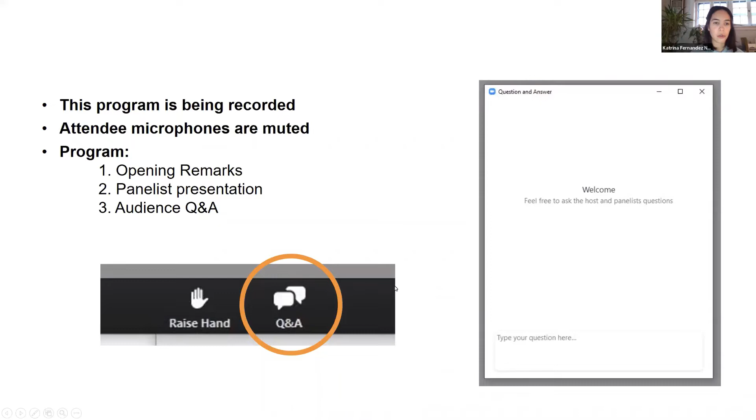For those unfamiliar, the CTBUH, or Council on Tall Buildings and Urban Habitat, was founded in 1969. It's a nonprofit, multidisciplinary, worldwide association focused on tall buildings and sustainable cities. As of 2020, the CTBUH organizational member network included over 2 million individuals in over 10,000 offices around the world. The Future Leaders Committee, especially here in Chicago, is a group of volunteer young leaders in the industry, and our goal is to get future leaders interacting, networking, and provide events like this to give everyone insight into what we're up to.

Now I'm going to introduce our speakers. JJ Tobolski is an associate at Thornton Tomasetti's Chicago office. He has 10 years of experience as a structural engineer. A Chicago native, JJ has been involved in the design of numerous high-rise and cultural projects, both domestically and internationally, in addition to acting as one of TT's leaders in structural optimization.

Tim Winstanley is a senior architect at ASGG, working across a range of typologies including cultural, super tall towers, and large-scale mixed-use developments, including two World Expos, such as Dubai 2020+1, which we'll be presenting today. Tim leads some of the most complex design efforts at ASGG, which, along with his on-site construction experience, ensures the design vision is executed correctly. That's it for my intro, I'm going to pass it on to our presenters. Take it away. Thank you, Katrina.

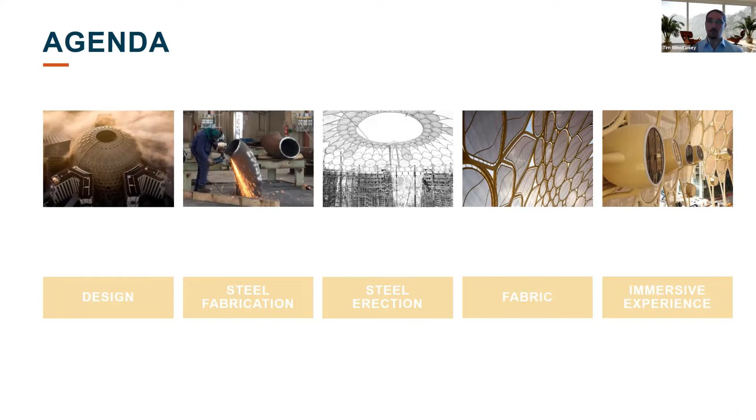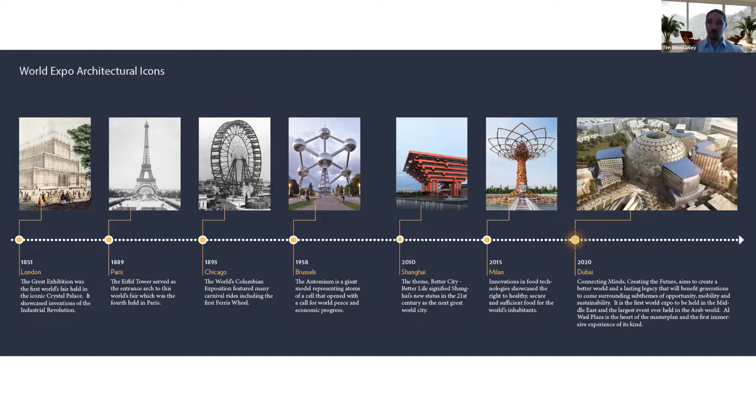A quick intro on the design. World Expo is an event where countries from all around the world gather to present and showcase innovations happening in their country. Throughout the past 100 or so years, there have been numerous icons known to represent those particular cities - for example, in Paris, there's the Eiffel Tower. As we move along towards 2020, a very important expo because it's the first expo held in the Middle East, the goal is to create a cultural icon for Dubai, linking their main theme, which is connecting minds and creating the future. Wasl in Arabic means connection.

One of the main things behind the design of this is how to design an experience first, a place for connection and meeting. Something we've always been doing is exploring ways to enhance architecture and experience through immersion using materials such as light, shadow, video projection, in addition to the solid built materials.

So again, just touching on the idea of creating experience first, and how do we start to harness all the activity that is going on. You'll see the 3 petals, and there's pathways that encircle each one, everything leads back towards Al Wasl. This is seen as the heartbeat of Expo and will become a beacon for the Expo, and then lives on in legacy mode when the development transitions to a new neighborhood in Dubai South.

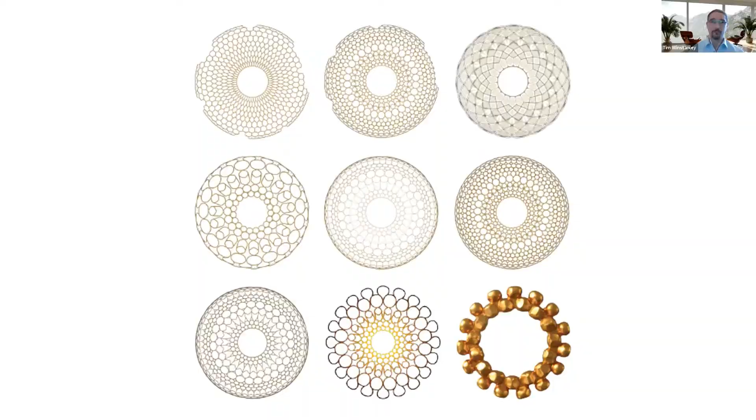One of the main things we're going to talk about is how this was constructed, and one of the ways to construct something of this scale and magnitude. While from the outside it may look complex, it's actually simplified into 27 radial segments, and this is a good segue into the fabrication because it leads to efficiencies during the fabrication process.

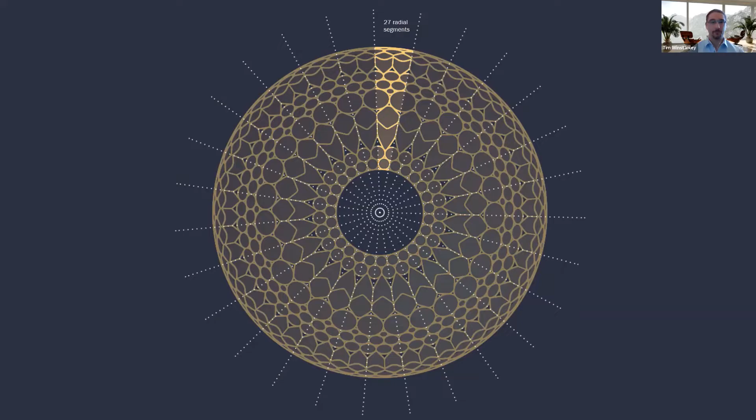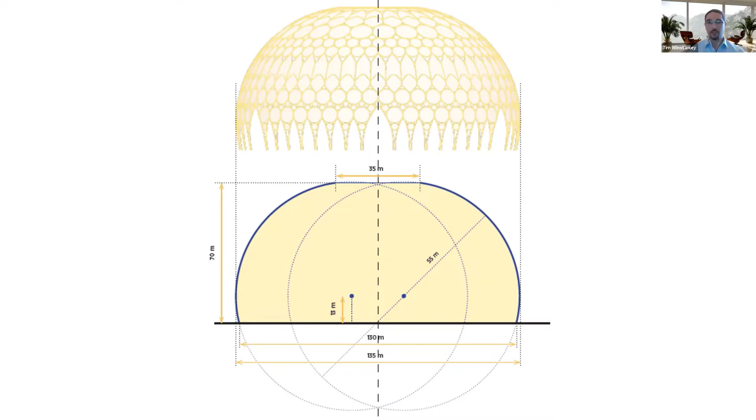Just to get an idea of the scale, the trellis is 130 meters in diameter. It's just under 70 meters tall to the top of the oculus, and the arc that makes up the frame of this is a 55-meter radius arc.

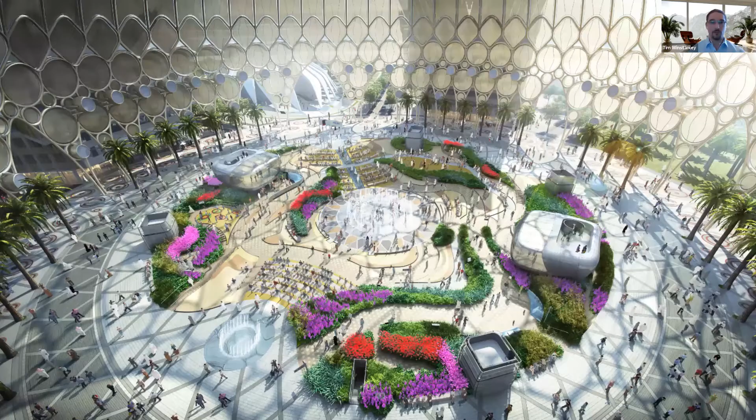This image here is showing what the Al Wasl Plaza and Trellis will look like during Expo mode. So the 6 months that Expo is operating, there's a bit more hardscape, but this is because it is going to be heavily occupied with all the visitors, and there'll be events happening every night and during the day throughout the course of Expo.

Now the interesting thing is for the expos, typically they're built and then deconstructed, but part of our vision at ASGG is to breathe life into these projects after the expo is done. So in legacy mode, once Expo wraps up, this becomes a garden and the central hub and node for the new development of Dubai South. This will live on as a cultural anchor in the south of Dubai.

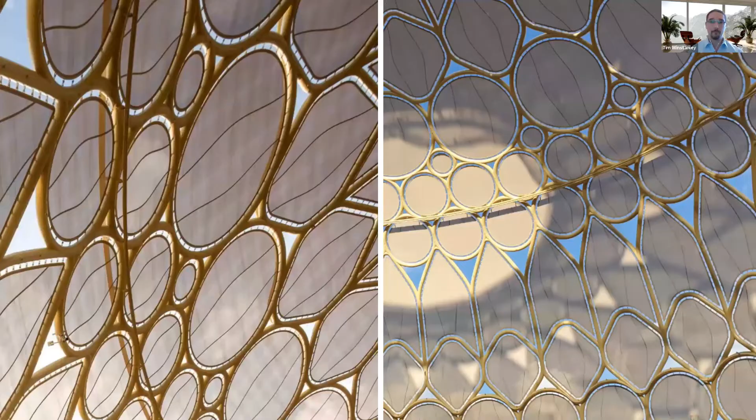Touching on the aspect of the fabric and the steel and this idea of playing with immateriality - playing with light and shadow and harder elements versus softer elements. The fabric is an integral part of this project, not only because it diffuses the sunlight, but also because it becomes the canvas for the immersive experience.

Just a quick stat rundown of some of the immersive aspects of it. Embedded within the steel pipes, there's roughly 2,800 LED lights that run along with the projectors. There's 42 projector enclosures that are cantilevered off the steel trellis, and then there's also 12 speaker enclosures that house these state-of-the-art speakers.

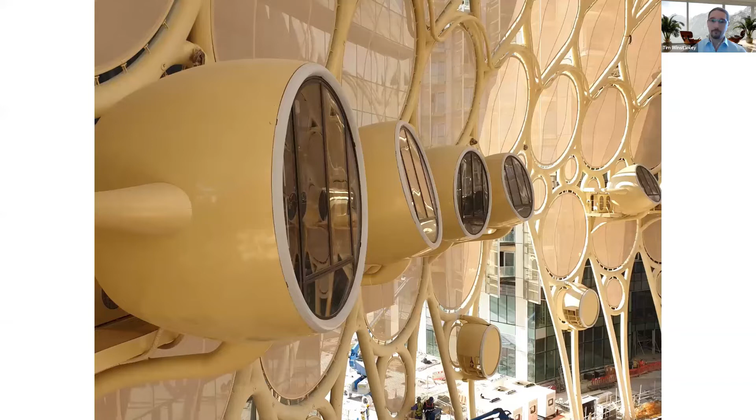This is just a snapshot, which we'll touch on a bit later, but this is showing the custom projector enclosures on the top portion of the image. Then in the lower right, you can see what's still under construction are the speaker enclosures.

This is a fairly recent picture - this is a projection all in red, indicative of the UAE's satellite just reaching Mars. Just to get an idea of the scale and the context of what's going on.

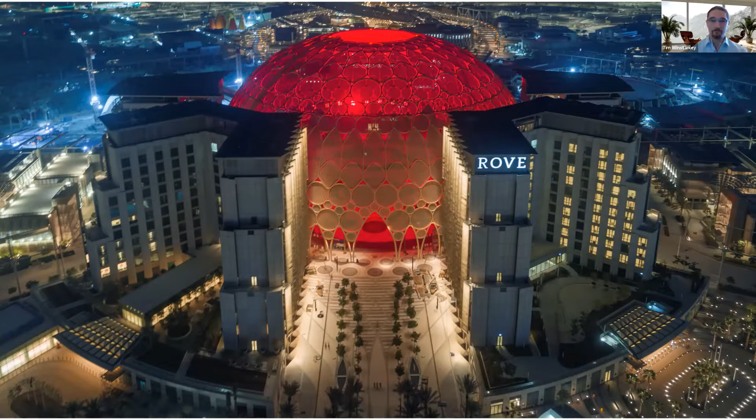The same thing here - this is an image actually. We'll go to the video. That's fine, we can start the video.

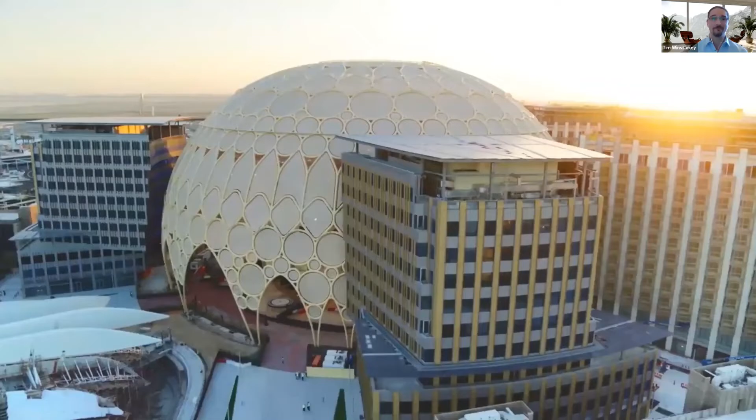So this is just showing some of the LEDs going off there. This is during a test that we ran back in January, showing the video projection in action here. And you can see the people at the bottom there for scale.

All right, well thank you, Tim. I think we'll catch back up with you when we start to get into the erection phase, for when you were stationed over on site.

So I'll add in a couple more things about the structural design here, and try not to be too dry, touching on some of the important aspects of doing the structure of something so unique and interesting. To give you a snapshot of the different parts and pieces we have, the trellis itself does not sit directly on the soil.

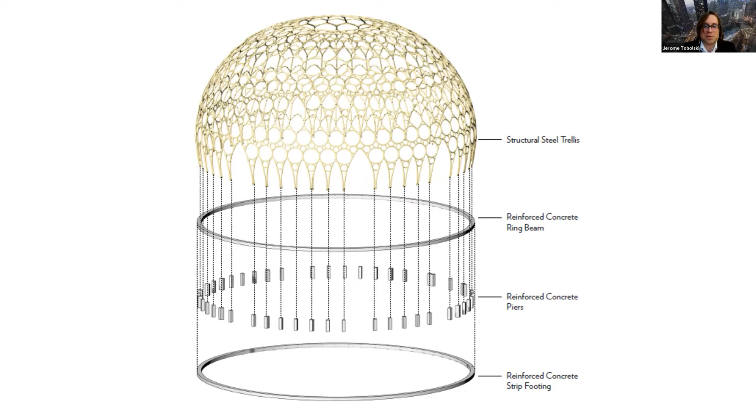There is actually a central basement underneath all the plaza work, and some site tunneling there to service the buildings around, so there was quite a few things we had to contend with. We have the framework sit and be founded on a concrete frame below it. This frame is composed of a concrete ring at the base, then a series of piers where each of the different arches of the trellis come down, and a strip footing. There's no deep foundations here - there's actually some pretty good quality rock that we're able to bear directly on.

One thing I want to add is there were many different iterations - they looked at very different frameworks early on, but there was also a lot of thought and attention paid to how these rings interface together. In addition to having everything simplified as a series of different pipes along the circle, we also wanted to ensure that everything was planar and in a 2D curve so it could be fabricated in a reasonable manner.

Not to say it's impossible to do some of those 3D swoops, but we knew that because of all the different complexities on this project, if we could refine the geometry to a point that everything was 2D based, we'd have a good look. It also accomplished two things: not only the fabrication, but it also helped achieve this really nice clean look that you see at each of the merging points.

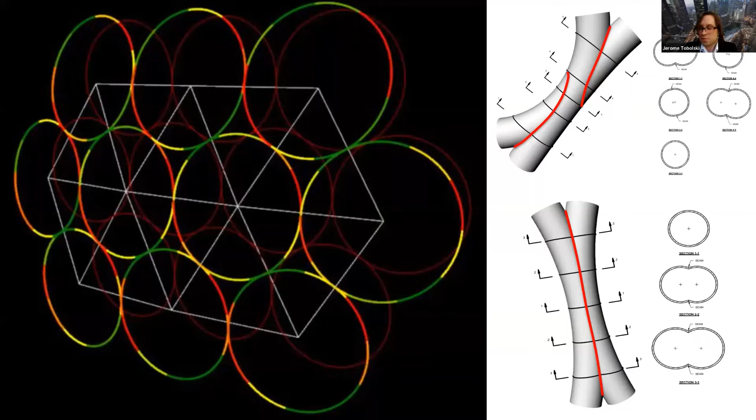Before we did some of this geometry studies, and we even continued to pursue these things throughout the construction phase, working together with the fabricator to alleviate some of those conditions you see above, because this thing is a sphere, so it's not always easy to have everything 2D planar when you have circles and different planes. In order to get those to join nicely, a lot of care and attention was paid to developing that. Just to give the most basic understanding of this framework - it is very complex at first, but in the end, it is still very much a dome.

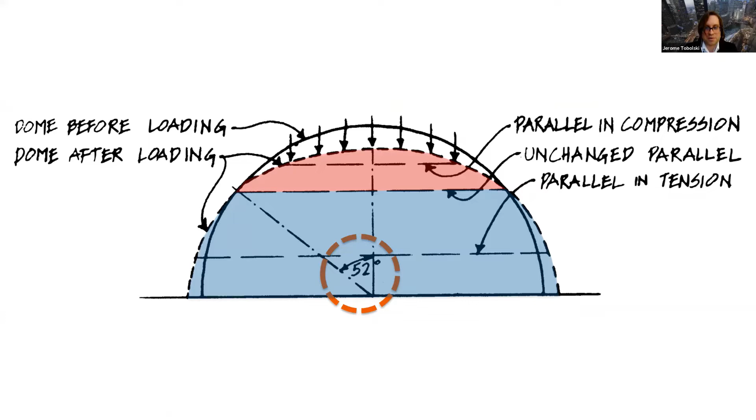Depending on where you're at throughout the height of the dome, those hoop stresses are either in tension or compression. At the top, it's in compression, pushing down and coming in, and at the base, those hoop stresses are in tension because it wants to splay out at the base - so those hoop stresses are restraining it. With everything being equal in a perfect world, you can mathematically derive that the point where that changes is about at the 52% marker, or 52 degree marker from vertical.

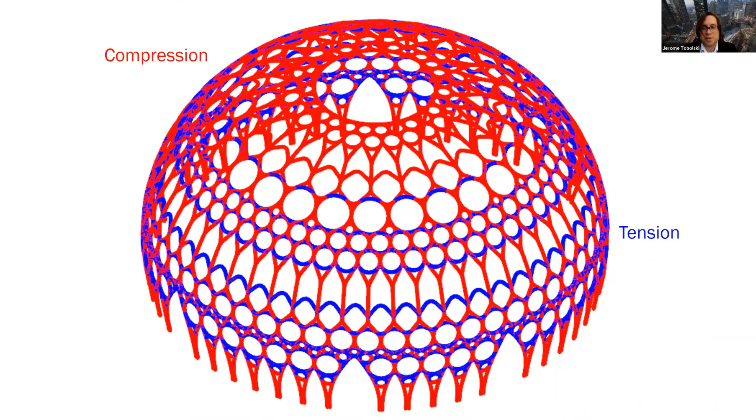In our system here, it might be a little bit of an odd looking path, but we do find that with red being the compression and the tension line, as you go up and down vertically, everything is primarily in compression. And then once you get beyond a certain threshold, you have tension stresses that go around the ring and help restrain that structure.

With the top being primarily in compression and this being such a slender and elegant grid shell, you really have to be careful about the sensitivity of the structure to buckling, not just under applied loads, but also managing imperfections that might occur during construction. If something starts to be built slightly out of tolerance, that can have really big knock-on effects on the structural design as a whole. So the way to manage that is to constantly be analyzing your structure and benchmarking to ensure you're not outside some normal bounds.

But if you really are on a threshold, really close, and designing something to the absolute limit, there can be some really intense increases in stress. That's something we were continuously mindful of and designed against.

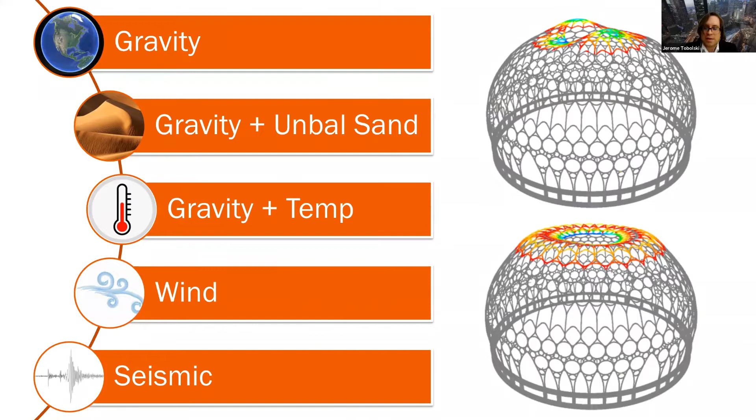We had to look at tens and hundreds of different possibilities that could occur. These are just a few buckled shapes, but we looked at them for all different conditions: wind, seismic. We looked at conditions with unbalanced sand at the top, as it was so sensitive, and it really is quite a lot of analysis work to go through all these things.

So we even developed some custom scripts as we went along in order to generate through these, do all the design checks, manage these things, and run them overnight to be able to work effectively.

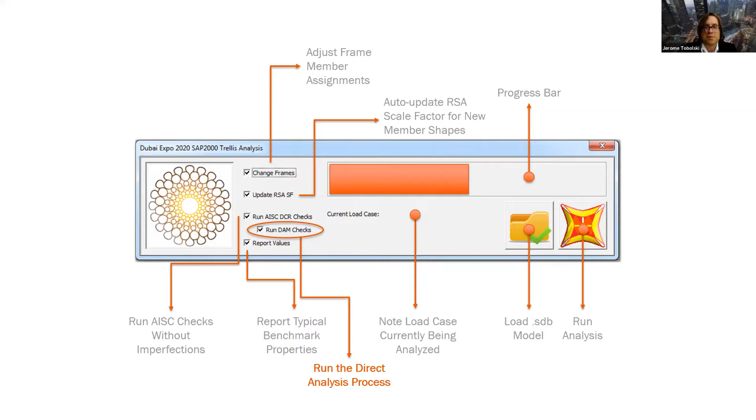The other thing I want to highlight about the region is seismically, it's more or less moderate. The Dubai municipality imposes some higher limits that you have to design for, but in general it's mostly wind governed.

We had done a high frequency pressure integration wind model with RWDI for this, because it is a very unique dome that has a center oculus open at the top, and there's all this area below with the arches and gateways that wind is able to travel through relatively freely. So it's quite different than just a solid dome.

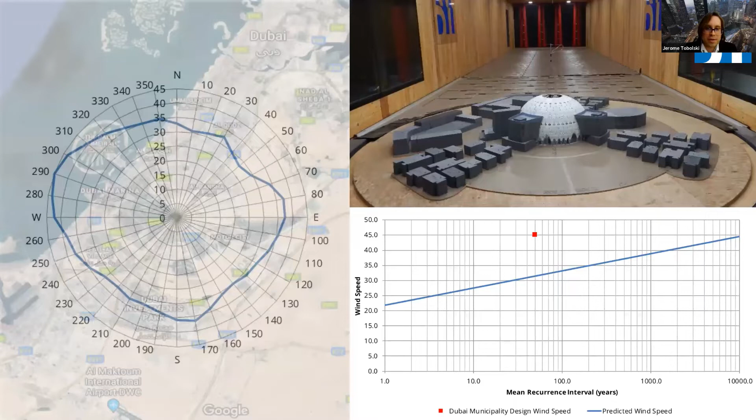The final part of the design I want to touch on is all these connections. Ultimately, we were not the final connection designer for the project. That got awarded to the fabricator, who had their own engineers that executed that work, because some of it is dependent on really how they want to build it. So in this situation, we just did enough work to justify to ourselves that the frame elements we were designing wouldn't have any hidden surprises as we got into fabrication.

So what we had done, we did a lot of modeling in place, a lot of mesh sensitivity studies and things of that nature. Pretty much everything short of just specifying all the welds, we really ran through a lot of the same checks that the fabricator's engineer ultimately wound up doing. We went completely top to bottom of the entire framework, and I identified each unique node and looked at the controlling cases for each.

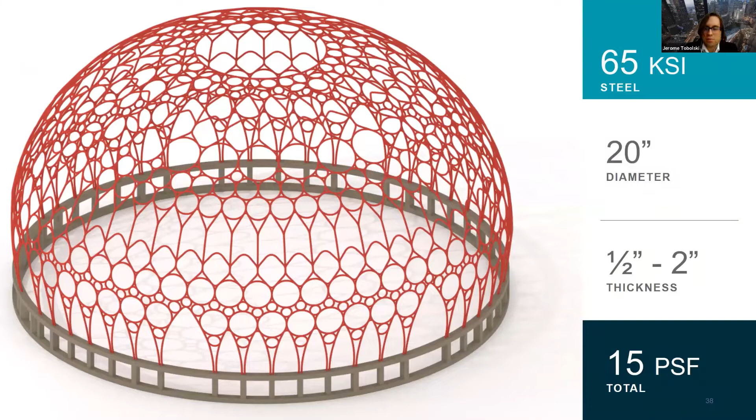Ultimately, in the end, this is the system we wound up with. We had 65 KSI steel, which is an S460 steel equivalent. A lot of that steel was coming from Europe, but there was also some from China. It was 20 inches in diameter all throughout, because we wanted to maintain a consistent diameter to help facilitate those connections, and also a consistent look across the whole trellis. The majority of it is in the half inch to inch thick range, but in some high profile areas like the UAE entrance, they get up to 2 inches for those big arches. In the end, it was a very lightweight, very elegant structure at only 15 PSF. So very well performing, efficient structure.

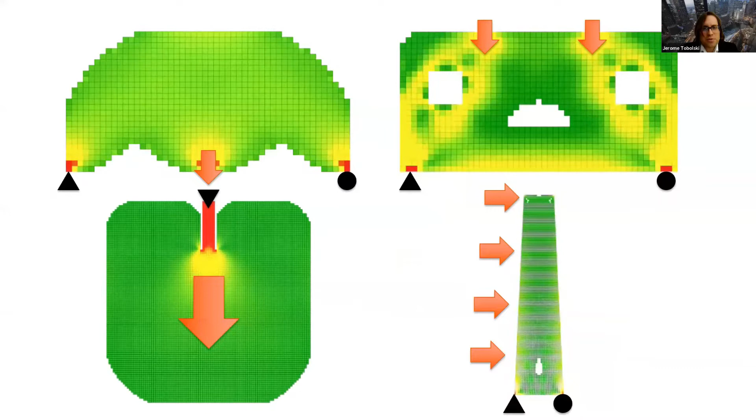And it wasn't just the framework that we paid a lot of detail to. We worked very closely with Tim and his team on helping to define the fabric brackets themselves that attach to the steel members. This was primarily done through using topology optimization.

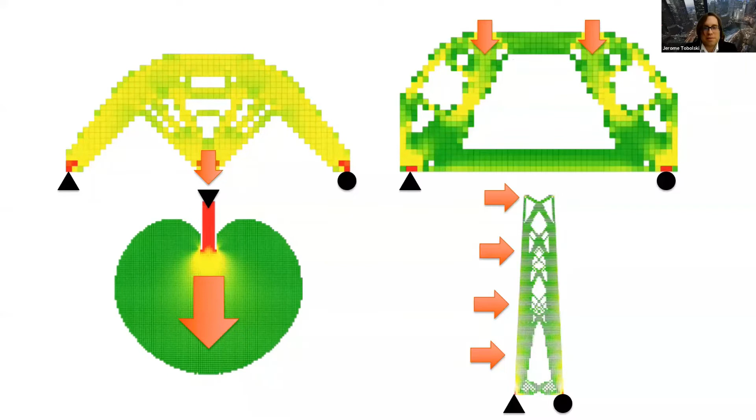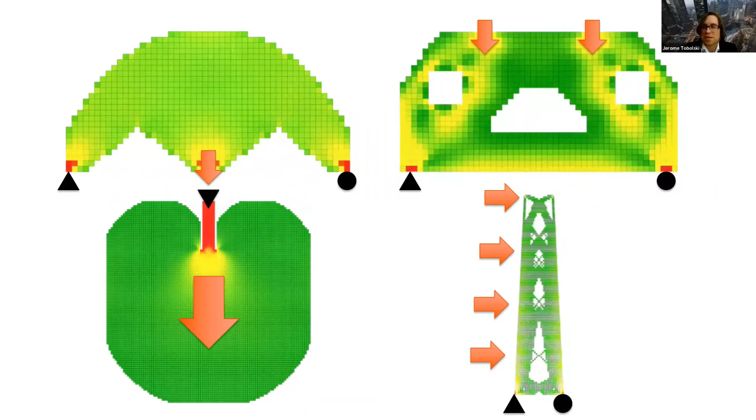We generally have an idea of what sort of optimum forms are, but in this kind of process, you start with a given design domain, what you saw in the beginning, and then at each step you start to pull away material bit by bit where things are not really doing a whole lot for you. You can either be doing that on a stiffness basis or a stress basis, looking at different boundary conditions and the like. On the bottom left, for instance, you see a situation where you're telling it that you can only remove material on the outside. By doing that, you start to see how fruit actually winds up being the shape that it is, because in nature that is the most efficient shape that it wants to be.

So maybe for these two slides here, I think maybe you just want to walk through that.

So running it through the topological optimization process, where we anchor the ends where it will be welded to the steel pipe, and then introducing the stress forces from the tensioning bolts, which you see in the bottom right mock-up there, this started to reveal the optimal path where we could keep the structure and then remove any of the excess material.

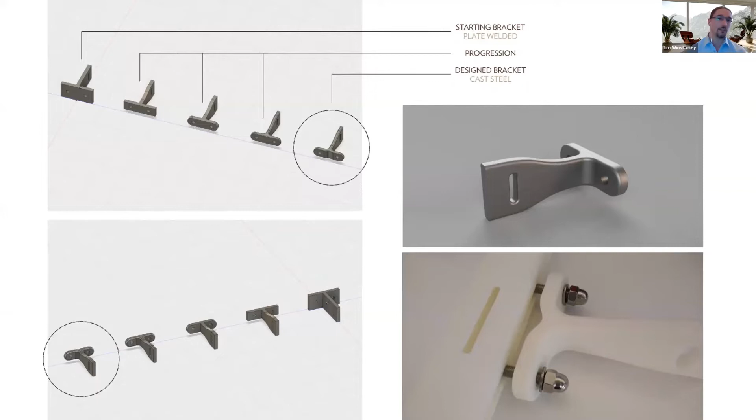So what we ended up doing was reducing the overall amount of material by about 45%, which, okay, it may seem not so much. The baseline bracket on the left weighed about 2.5 kilos, and the one on the right, which was fully optimized, ended up weighing about 1.5 kilos. If you spread that over the 17,000 brackets, then it starts to add up. So this was an interesting process, a small part of the overall trellis, but something that was quite interesting.

All right, thanks Tim. So then now I'll get into the fabrication for a little bit before handing it off again. When this fabrication process began, because of the scheduling that the fabricator had to hit, there was a really aggressive push to be able to work fast and work through a lot of different iterations and get answers to questions on things. So ultimately I wound up going and being stationed in the fabricator's office, was Cimolai, in the northeastern part of Venice there. It's actually about an hour and a half away.

As we said earlier, the full design and general contracting team was Cimolai and Rimond, a joint venture between these two Italian companies. I was there for probably a period of 4 to 5 months as they were in the thick of it, doing all these different mock-ups and also putting everything together.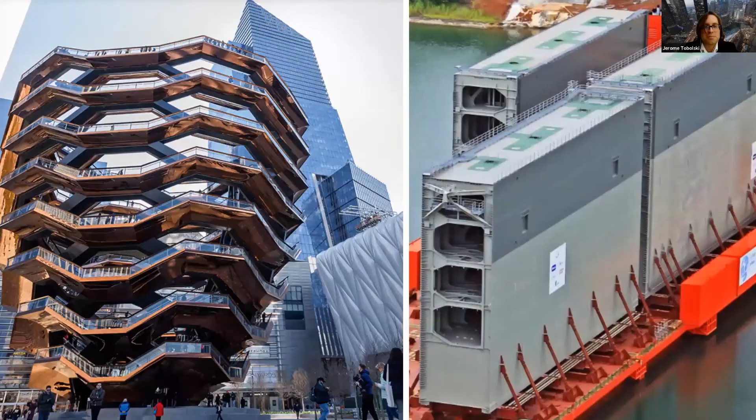So just a brief snapshot of Cimolai. They've done some pretty high profile and complex projects throughout the world, so they really were a good fit for us to deliver this project. On the left, we have the Vessel in New York, and they also did work on the Culture Shed, which you sort of see in the background there. On the right is the Panama Canal. So big, large-scale structures are not new for this organization.

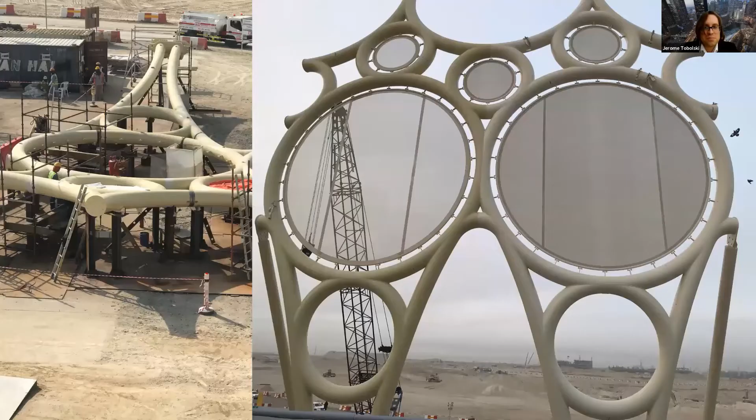And even before they were awarded, there was actually quite a bit of attention where there was a pre-construction steel assist team that was also working with the design team to help us define things really early on. So when we did finally get to that award phase, there weren't going to be any big surprises.

So there was a site mock-up that was done, and this was used to do many things like test different paint colors and look at different bracketing and different fabric joining and things of that nature, even different steel connection approaches. So this really was used to define a lot of things for us early on.

And then when Cimolai came on, they also did a lot of their own mock-ups, and some of these are just a couple images from the first workshop that we had with them. They were almost like living shop drawings, where this mock-up was used to define a lot of the finishing that was going to occur in the final product, in relation to the grinding of the welds and how that transitioning works out, how the seam shows up or how the seam's ground down, many different things.

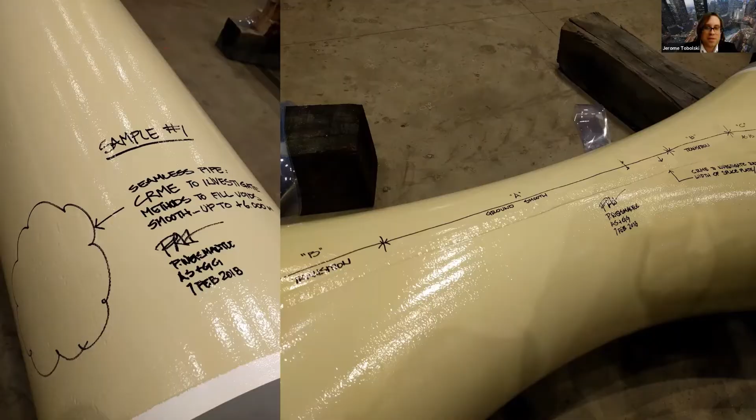Just to give you an idea of how some of the finishes on these things look, on the left there's seamless pipe where you don't have a seam because the pipe is made by being extruded through a die. On the right, there is a seam in that member because it starts out as a flat plate and then gets rolled up through a mechanical press. So a lot of attention was paid to looking at different situations.

A lot of this seam pipe is something that Cimolai manufactures themselves, but because so much workshop space was really being devoted to the development of the actual frame, in the end it wound up being more appropriate for many concerns, and especially aesthetically, to go with the seamless pipe.

But the only issue with the seamless pipe, which was a little bit interesting to us, is that when it got painted, for us as structural designers it looks like painted steel, which is sort of what we expected. But that pitted look was not exactly the smooth finish you get with the bent plate on the right. So there was really a desire to have the finished look of the right, but not have the seam, and be more like the left. Ultimately an epoxy was used, and I'll get into that a little bit later.

This just shows this giant press that they had where they actually make the pipe. And then as we get into discussion about grinding some of the welds, it's important to be careful about what sort of specification you're saying, because depending on where you're at, there are certain different meanings about what exactly is ground smooth filled.

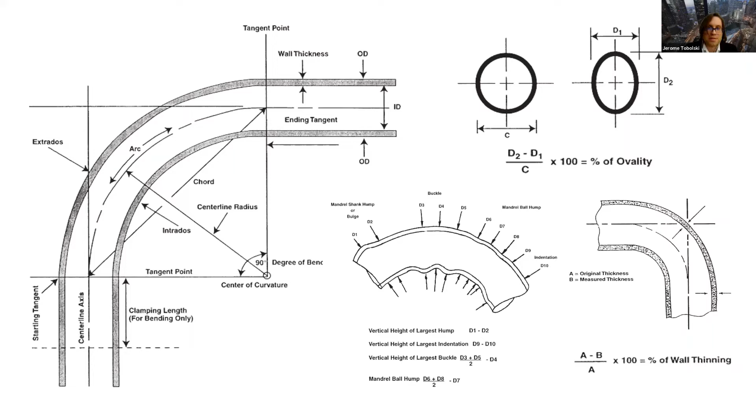There's also some crippling, but that's not really a big concern with induction bending - if they go slow enough, you don't really get that waviness. It's actually pretty clean. So again, this is just the ovality and how it can change some of those properties.

So for the big arches, they were able to feed them into cold bending machines. They'd put in the whole arch, the biggest section they could, and have it come down and press it, getting those pretty big radii.

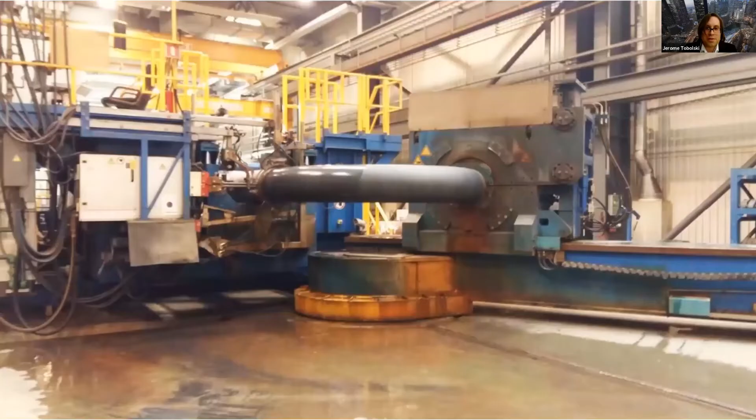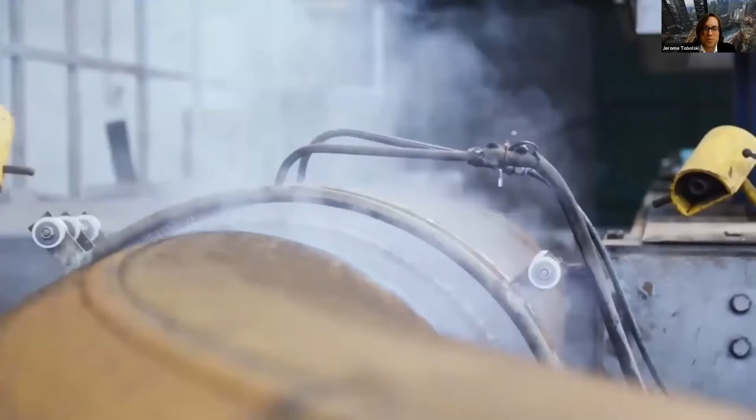But then for induction bending, that's actually a machine - I'll show a quick video of this process where the pipe gets heated up. There's a coil on the outside that's electromagnetic and heats the steel. As it gets heated, it's drawn through the process. There's a clamp on the end with a set of rollers that pulls it through in a gradual swoop to make whatever bend is needed, then it immediately cools it - that's why you see the steam as it comes off.

After each one of those bends, quite a bit of work gets done to those elements, so much so that it actually changes some of the mechanical properties. In order to revert back, these go into giant ovens for 8 to 10 hour heat treatments that help get them back to the properties they used to have. That was very important for us, since they were doing structural work, not just conduit or something where this might not be necessary.

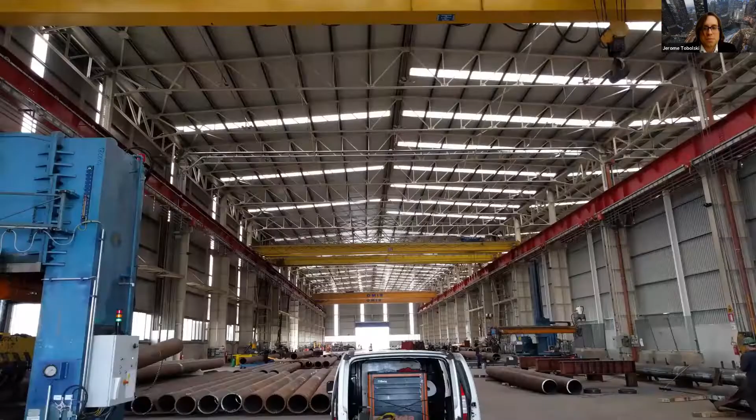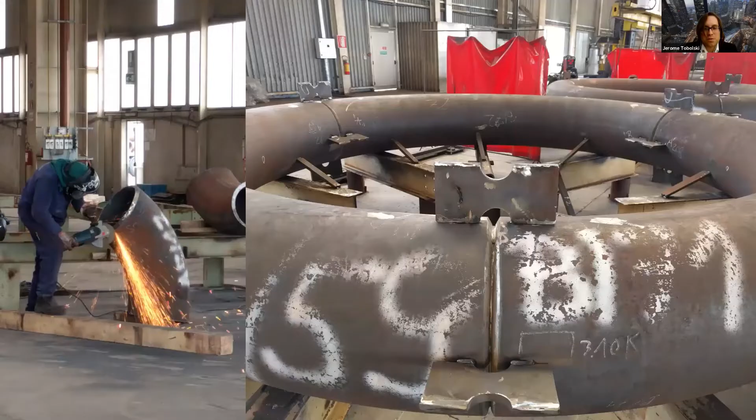So I'll very quickly wrap up by stepping through the workshop to show how they put each of these things together before shipping them off to Dubai. Here's the staging area - they had all the pipes, including some bent ones from other places, and they ground off the edges to do weld prep for each of them.

Each ring was done in a series of 120 degrees, which is why you see 3 different zones there. Then they would fully weld them up with complete joint penetration welds, not necessarily where the site welds were going to be, but just to get them as one continuous ring. From there, they would cut off wherever needed for each of the different connections to adjacent rings.

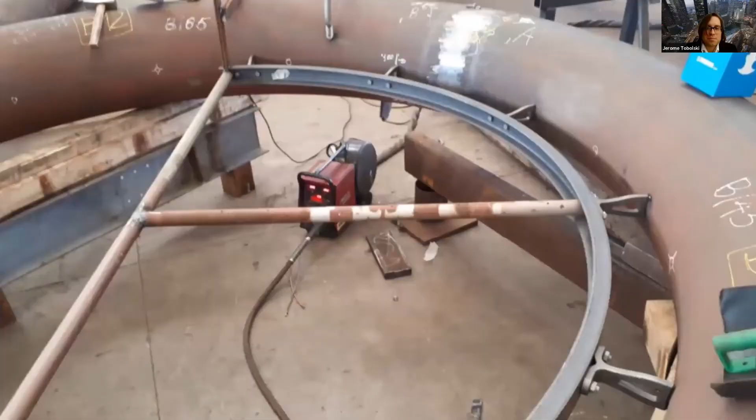And then at that point in time, they would also have the jig to put in all the fabric brackets that you can see around there. And there you can see that full penetration weld up top there.

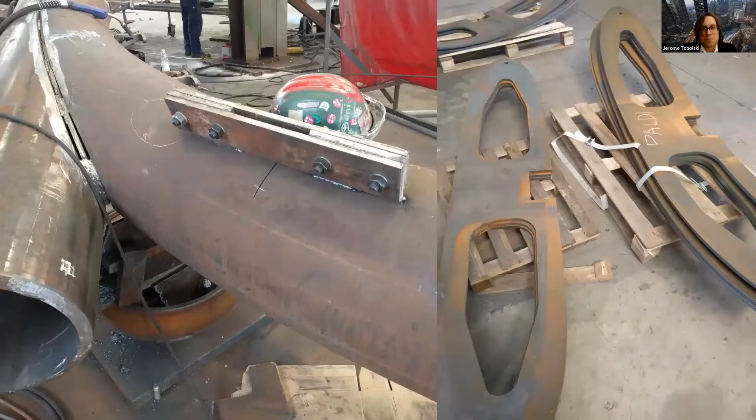Once they got all that put together, they also had some splice plates that helped facilitate that connection. The splice plates did a few things for them: it gave them a clean surface to weld to, and the reason they have those openings is so all the conduits for the LEDs and other systems could be fed through uninterrupted.

So what you see here is kind of a giant fit-up frame, which you'll see in the next photo. They get everything geometrically right before they make the full connections between the adjacent pieces. Then there you see an intended splice area for the different modules that they ship out. This gives a bit of scale, and here's a shot from above - they had a small crane there one day to take a photo. This would occupy an extreme amount of space in their shop, but it was really necessary to make sure all the geometry was correct.

And then finally, to finish, perhaps Tim, you want to talk about the painting? Yeah, so as JJ mentioned, one of the issues with the seamless pipe is the pitting.

So what we wanted to do at the lower levels, between ground level and close to 15 to 20 meters, depending on where the rings start to connect, we wanted to create a smooth, almost glass-like finish. This image shows the filler and priming process to fill in all the pitting and make it smooth.

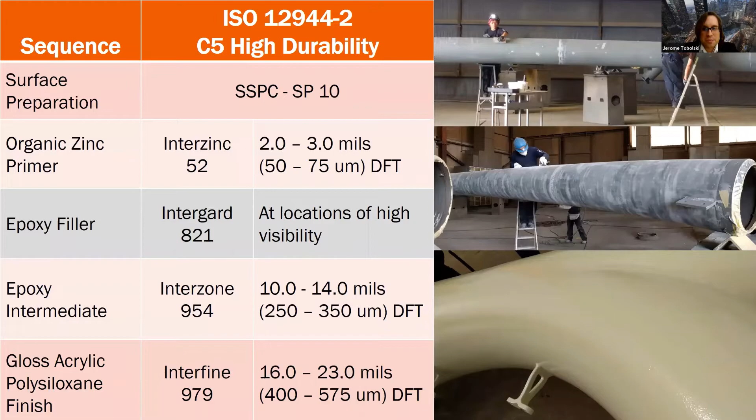Yeah, it's incredibly challenging too, being on a round surface. There was a lot of effort spent into getting that look - a lot of sanding. And then here we have our finished product, and then it got put on a boat and shipped off down to Dubai.

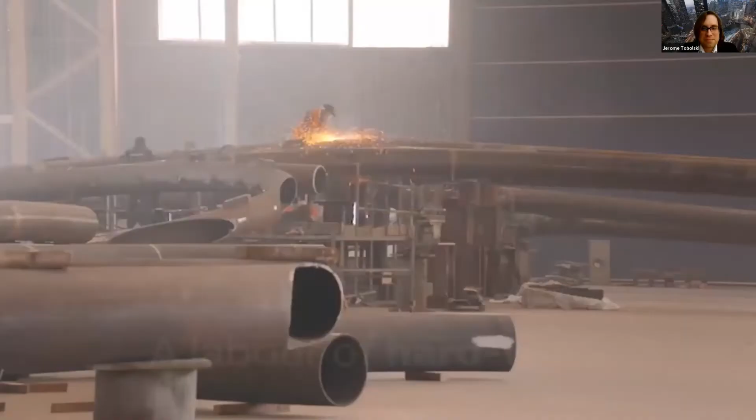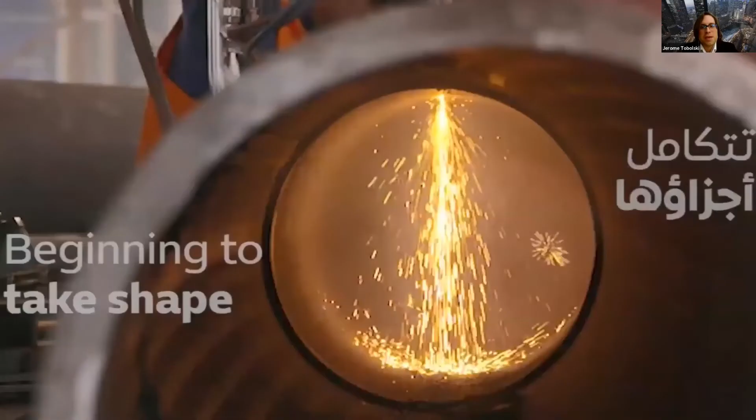So initially, I'd say roughly the first third of the trellis was fabricated in Italy itself. Then when they sent these modules on and started getting their site work up and going, working with their local fabricator, they did wind up fabricating the rest in Dubai. So there's a little bit fabricated in each location.

I'll spend a few minutes talking about the structural implications on the erection, and then I'll have Tim finish this up as he was the one on site, and also talk about the immersive experience. So really quickly, the...

The final solution applied to erect the trellis was, because of all the constraints - we have all these buildings around, a basement in the center as I mentioned, and also the tunnel - it was really tight and difficult to come up with ways to have cranes on the outside and cranes on the inside. There wasn't a whole lot of area to put stuff. So ultimately, the best course of action for logistics, which also had structural benefits, was that the first two-thirds of the trellis were erected in place.

So you start to see these things stack up in the first three photos here. Then in the fourth one, you start to see these strand jacking towers come up around the perimeter. These strand jacking towers also help serve as the frame that would support the first half, and there was scaffolding everywhere too, because they needed to do all the site welding.

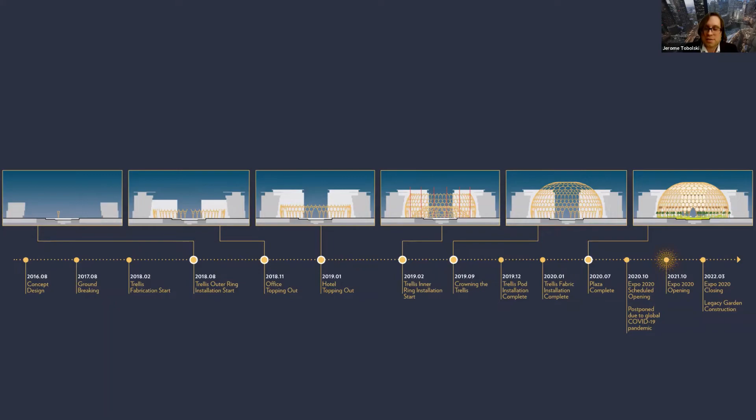And then in the center, they built the upper hat of the trellis. Over a period of about a day and a half, they lifted it up from the base and installed it on top, and then about a month after, finished all the site welding to finalize that connection, and then released the strands. So just a quick snapshot of all the scaffolding.

And again, here's that frame with the different strand jack towers, and in the center too. So everything was being put very much in place.

In some situations, you really have to be mindful of how things are going to be built. We design everything to be in finished condition, but we have to acknowledge the fact that there might be some intermediate steps in order to get there. But in this situation, everything was really built in the final shape and place that it was going to be.

The only thing that really had some extra attention paid to it was that connection between the two, because there were some things like cables in the center that kept it from splaying out as it lifted. Some of that is imparting loads onto the trellis that were not necessarily in the initial design. But because we knew those things going in the beginning, we had planned and given some considerations to that from the start, so it was not a major issue that we had to address.

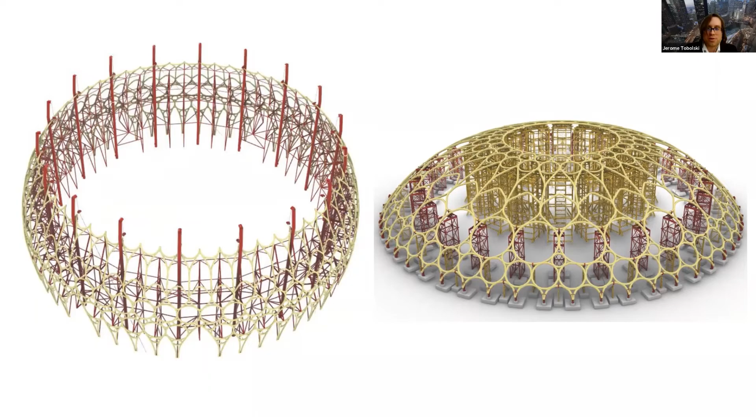We just had to make sure all our assumptions were aligned with the fabricator engineer, Faith, who had done all this analysis work in order to justify their approach and make sure that all the working stresses and everything were acceptable. And finally here, just a snapshot of how that connection occurred.

There was actually a makeup piece that had to go in between, because you needed to give space in order to lift it up.

And then once they had everything in place, they would release each of the cables in the center, sort of in a way of like tightening a drum or detightening a drum head, where you go at each end, release them, and then work your way around in a circle. So you're doing everything in an even balanced manner so you can get everything to line up nicely in the end.

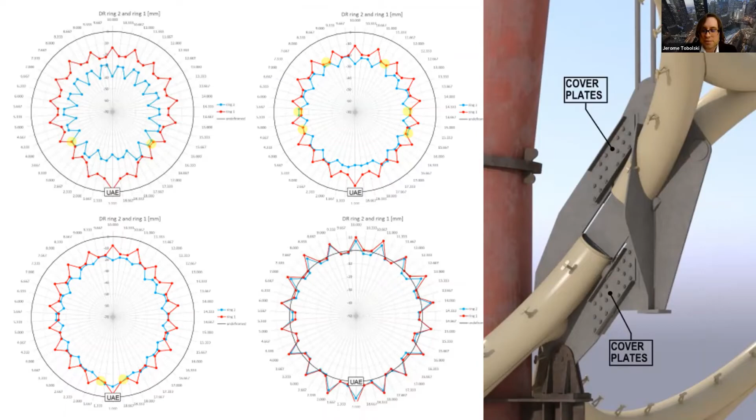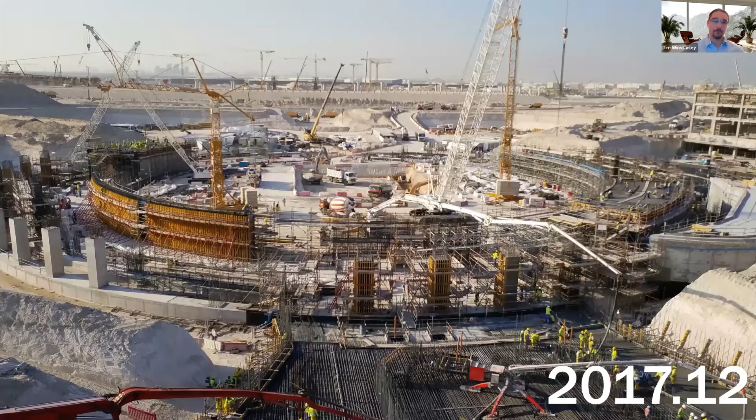This is showing the scale of the underground structures. These ring beams are about 1.5 meters by 1.5 meters, and I believe the height for these columns is about 6 to 7 meters.

And then there's a bit of a pause while things started to take place above grade in preparation for the erection process. So what you're seeing here are the first elements starting to get erected. What actually happened is they erected every other column until they completed the ring, and then they infilled it with the columns in between.

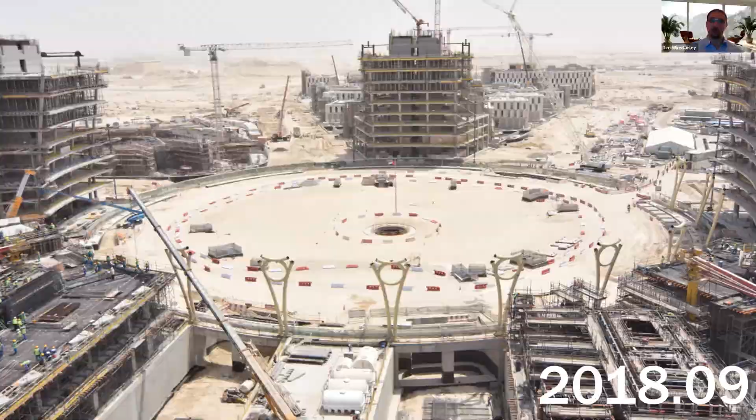And once those were all erected, it became a sturdy foundation for which they could start adding elements on top. So what you're seeing here are many of the loose pieces, waiting for aggregated assembly.

What actually happened in a separate area from the site was these smaller pieces were assembled onto jigs into larger aggregates to ensure precision and fit. They were all surveyed prior to being trucked over to the site. So this would be their centralized laydown yard for storage and then pre-assembly.

And so as we start to progress towards the end of 2018, you can see that the pieces are starting to grow on top of the first pieces here.

On the left, you can start to see some of the larger ring assemblies being stacked on top. And what's actually happening to the right, you're seeing temporary scaffolding that's holding up the initial columns. As those start to get connected and are free to stand on their own, the scaffolding is removed. And on the left, a more lightweight K-trussing starts to be erected in order to maintain stability as we move upwards with the elements.

Again, here you start to see the aggregated assembly starting to grow on the left-hand side. And in parallel with all this temporary scaffolding, we're starting to see the king posts for where the strand jacks would eventually be assembled on top.

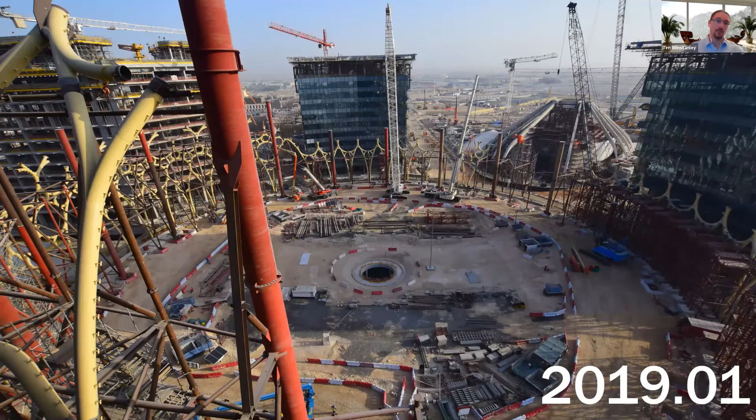On the left-hand portion of this image, we're starting to see the last elements of what we call ring one, which is the lower half, the lower 47 meters of the trellis. These king posts serve both as braces for the K-trussing, and they're also serving to do the strand jack lifting later on.

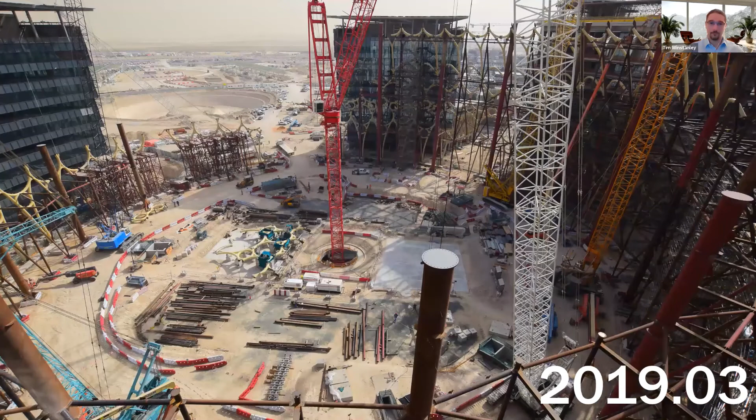What's interesting, as you can see, there's numerous buildings going on, with all sorts of construction activity happening all around, so the site started to get quite congested. In the middle here, we have a tower crane that was erected to expedite the pre-assembly of these larger elements. The loose pieces from the laydown area start to get aggregated into larger elements, which are then lifted into place with the crawler cranes you see to the right of the image.

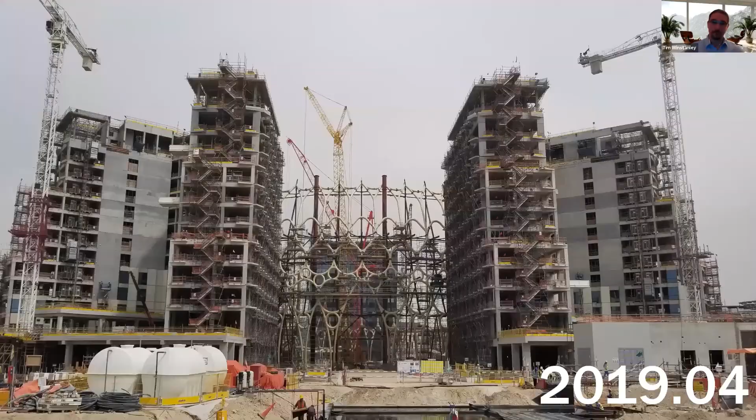This image was taken from the main entryway that people will take into Wasl Trellis. You can see that ring 1 is completed, and these chevron elements mark the top of that. As discussed earlier about the steel pipes and various sizes, here you're seeing a gateway arch, which is larger than normal, allowing for vehicular pass-through as well.

Again, another image, and you can see through the steel in the foreground all these aggregated elements that could end up being 15 to 20 meters long, all lifted into place with crawler cranes. It was quite impressive when they started lifting these larger elements.

Here we're starting to see the assembly of the upper portion of the dome, which took place within the bounds of Wasl Trellis. It was essentially erected in place, and then all we had to do was lift it vertically and complete the connection.

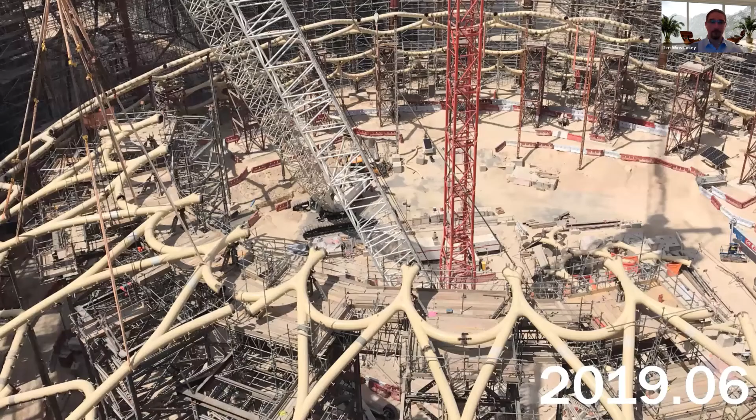Again showing how congested it started to get. The tower crane served a purpose to help expedite lifting the smaller pieces into place. Here we're coming in on closing up ring 2, and you can see on the slings on the left one of the largest elements for ring 2, which is a chevron about 10 meters long.

This is showing we're getting pretty close to completing the concentric ring. On the path on the left, they ended up working their way outwards so that these crawler cranes, which were up to 10 stories tall, could eventually back out because they weren't able to lift over ring 1, which you can see in the background. It was a complicated process, but eventually we got there.

This is showing the completed ring 1 or ring 2, and we've started to insert some of the fabric. One interesting thing about this image is that while it would have been ideal to put all the fabric in while this was on the ground, there were issues with uplift. You can imagine if all the fabric was in place, this thing would want to blow away in the wind, so there was a limited amount of fabric we could put in.

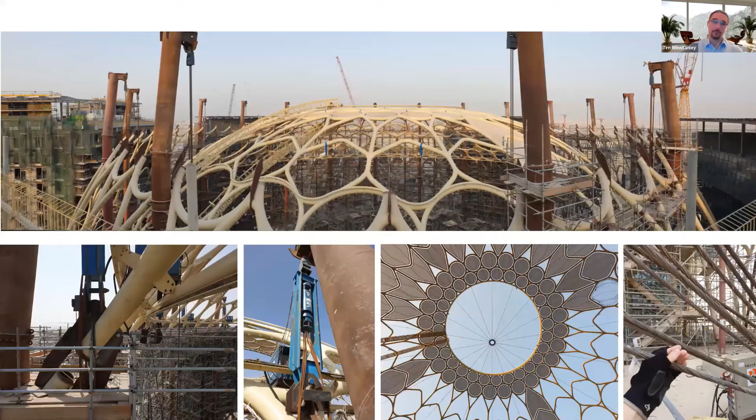This is showing we're about halfway through the strand jacking process. You can see all these strands hanging from the top of these king posts. The image in the middle, second from the left, is actually the jack, which is surprisingly not that big, and the image on the right shows the wires for scale. So relatively, it was a very light component that lifted this into place.

The image on the left shows once we finally got it up to the right elevation, there's about a 500 millimeter portion left unconnected, so there would be an infill piece that goes into there. Once these cleats were attached and the alignment was completed and surveyed, then we would insert the infill piece.

The middle image, second from the right, is showing the radial arrangement of the tension wires. You can imagine if you just were pulling up on the edges of this dome, it would want to pancake and flatten out. The interesting thing about this radial arrangement was it allowed the guys lifting it to introduce tension or release pressure in order to align the steel and keep it from flattening out.

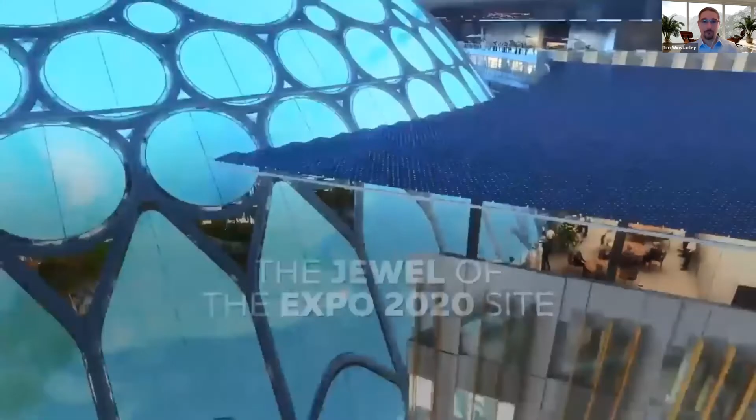This is a video that Expo did during the strand jacking.

Okay, so next we'll go over the fabric and some of the bespoke components that make up the immersive experience. Just so everybody gets an understanding of how much infrastructure is actually within the steel tubes, we have speakers, video signals, low voltage lines, BMS, water, aviation lights. So it starts to become highly congested.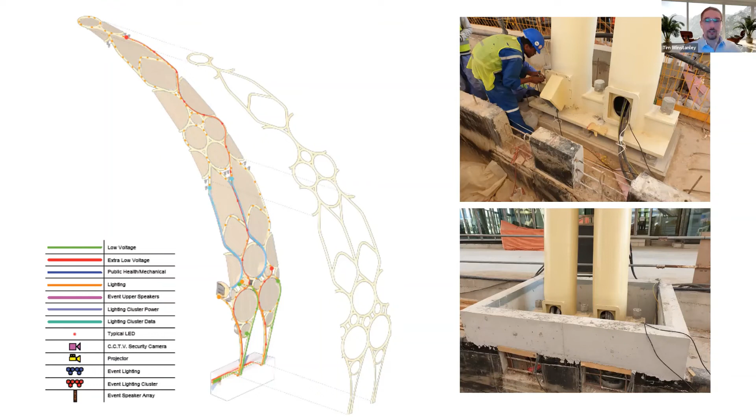One of the key strategies here was determining the routes for everything to take. The image on the right shows how this stuff starts to come out. There's a sealing mechanism developed together with the contractor to keep the outside environment from penetrating into the steel tubes. Once they exit, there's an underground trench, and from there everything runs the circumference of the plaza and enters the basement to their designated termination point.

Starting with the fabric panels, the fabric is a PTFE fiberglass mesh, basically a Teflon coated fiberglass mesh. One of the important things when searching out materials was finding something non-combustible, so there were only a limited number of options to get the Class A rating. This PTFE fiberglass mesh, with an open area of about 20%, made the cut.

This is made by Saint-Gobain in New Hampshire, USA, and it was fabricated and cut by Taiyo in their factory in Shanghai, China.

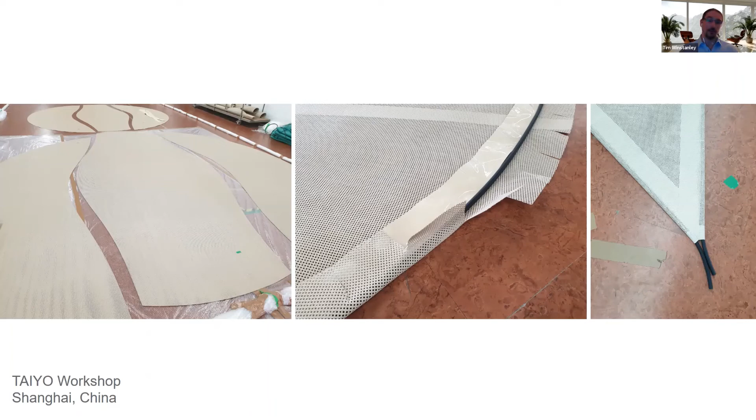Moving on, this is after the panels have been fabricated, shipped to site, and then unrolled. Here you see part of the crew starting to assemble the aluminum rails, which you can see are these rounded shapes. There are straight parts, but they come in lengths of about 3 meters, just for ease of putting everything together.

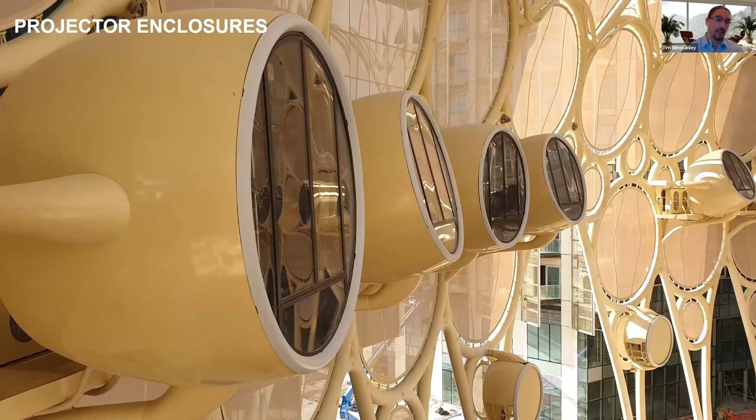Starting on the immersive experience, this is a critical part of the trellis, and also in legacy mode. One of the things we had to develop was how to enclose these very expensive laser projectors from the elements.

Being in Dubai, there's a lot of dust in the environment, and it gets very humid in the summer. So what you're seeing here are bespoke enclosures inspired by airplane nacelles that are fully conditioned and house the fan coil units. There are 6 laser projectors within each of these enclosures, in addition to all the various video equipment, hardware, and electrical panels.

So just a quick breakdown of some of the materials and components involved in the fabrication of these. These are all aluminum - an aluminum shell that's hydroformed, with aluminum ribs. The only steel component are the arms that cantilever off the trellis.

The interesting thing about this is that each projector is pitched in a different orientation in order to correspond to where those video projectors are pointing on the fabric.

Another important aspect of this is the glass. What we ended up using is a dual pane assembly of 99% clear specialty glass, typically used for cinemas, with an anti-reflective coating on all 4 sides of the 2 panes. There's hydrophobic coating on the outside and the inside - the outside to shed any precipitation and dust, and the inside, in the off chance there's condensation, to shed that as well.

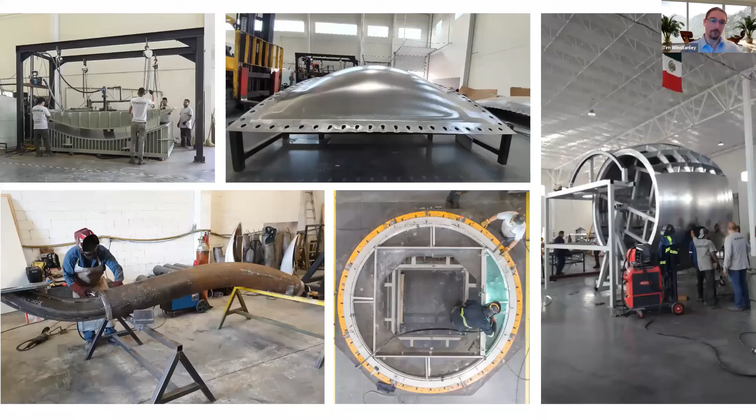Another interesting part of this was that because the actual shell of these enclosures is doubly curved, and given the diameter of these, which is about 3.2 meters, it became difficult to find an existing company who could either stretch form or form these panels some other way. So Kinetica ended up building their own hydroform, that's the image to the left there.

What happens is they feed in a flat piece of 16 gauge aluminum, then close the mold, then inject high pressure water. What results is the image in the top middle here, which is our perfectly formed panel.

That panel then gets sent to a CNC router, which cuts out the exact piece from what was hydroformed. The image to the right shows it after it's been cut, and there are 8 panels that make up the exterior skin, so they're starting to stitch together the aluminum panels. The image to the bottom left shows one of the support arms, involving the induction bending process. Within these tubes, there's also the video lines that eventually have to be fed through.

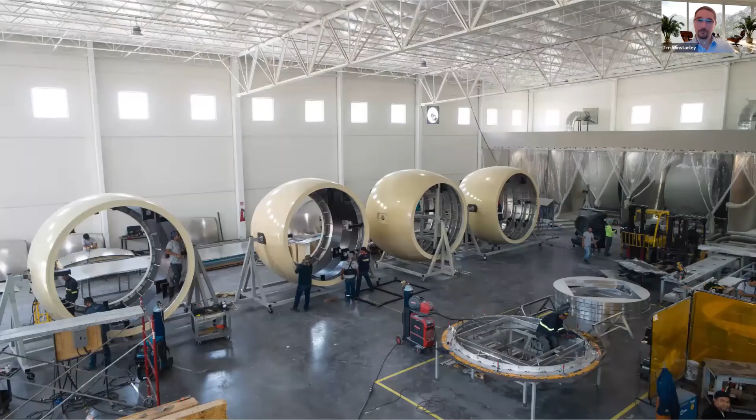What we're showing here is the fabrication line within their factory. There's a bunch of various components - we have the rear frames, all aluminum construction, the internal skin, which is aluminum being applied on the far left, as well as the insulation, and we're seeing the painting booths in the background.

This image on the left shows a transport frame, which also doubled as the lifting cage for the erection on site. Given the nature of the material and the paint job, which you can see on the right - a base coat of polyurethane followed by 5 layers of clear coat mixed with gold flake - in order to protect all the finishing that had been done, these transport cases served double duty as they were shipped from Mexico to Dubai, and then also for the lifting.

Once it was bolted into place, this frame was removed, and you can see these black conduits - those are connections that would have to be made mid-lift to the bibs that were waiting inside the trellis.

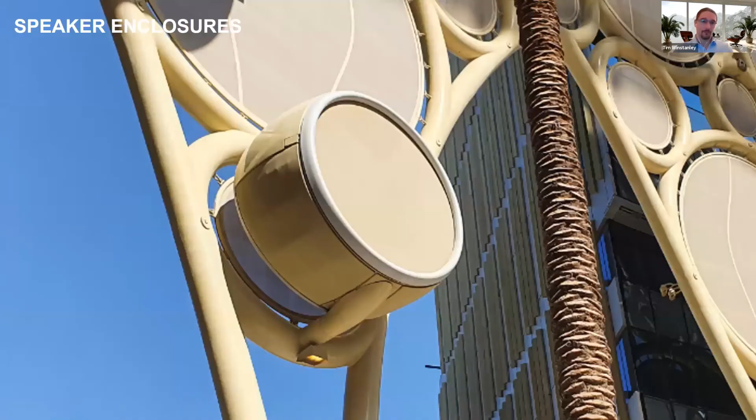Moving on to the speaker enclosures, these were built by Kinetica as well. They house the speakers and subwoofers, and were designed in conjunction with acoustic consultants so that all the sound waves are projected towards the plaza.

One interesting thing is it's basically a two-part design. The top half and rear of the enclosure are acoustically opaque, using glass fiber reinforced concrete cast into the frame, which helps reflect sound back towards the plaza. The bottom half and front are acoustically transparent, using a specialty fabric 10 millimeters thick, dyed to match the trellis color, which allows sound to pass through while preventing dust particulate from entering.

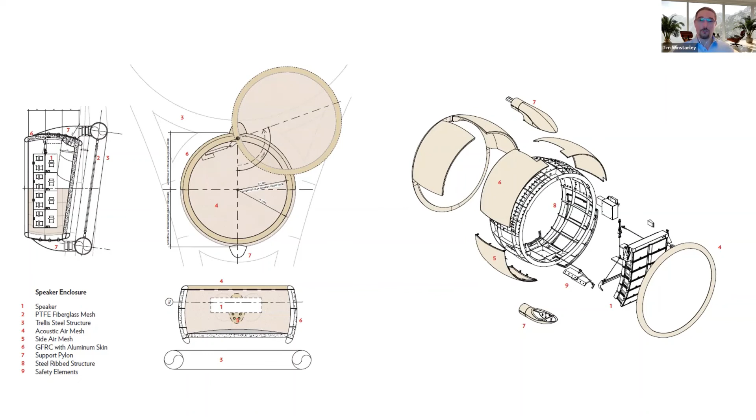This system was built with 13 millimeter steel plates for the ribs, which were anchored to the structure with steel pylons wrapped in fiberglass covers.

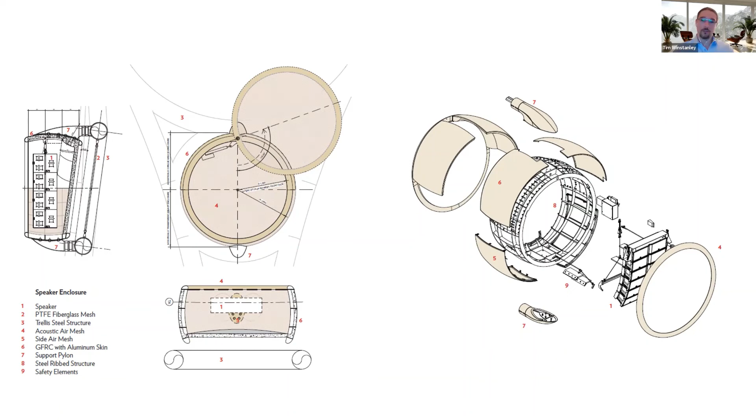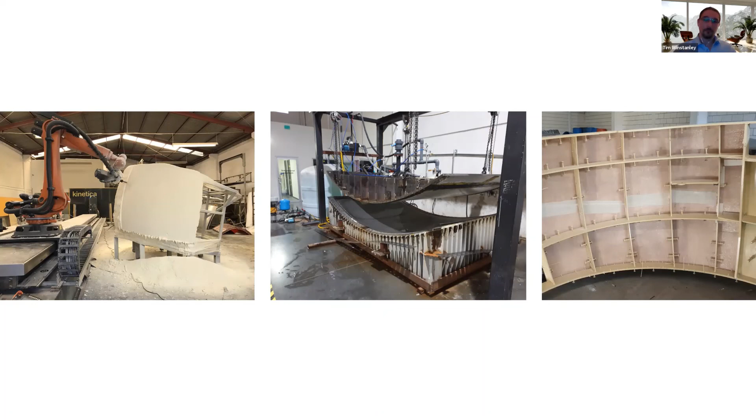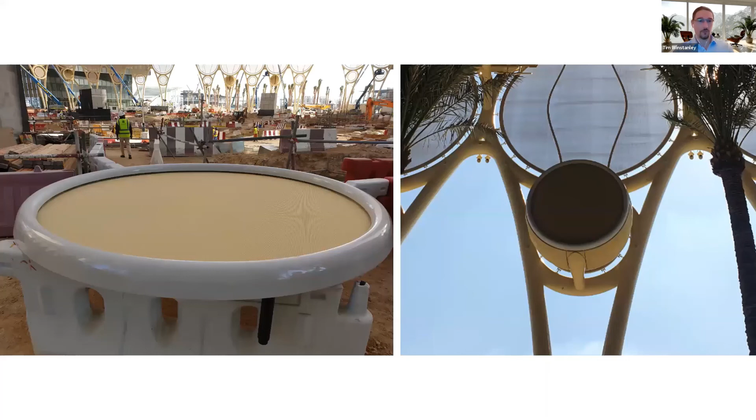This image on the left shows the part that's actually movable. It rotates about 100 degrees to allow for installs and maintenance. The gray element we're looking at is formed from a flat piece of aluminum that is spun — they apply the flat aluminum piece and a rounded bulb, slowly applying pressure to create this curved shape so there are no joints. We're told this is the largest spun aluminum piece in North America.

This was an interesting process, and Kinetica ended up having to make a jig for the fabricator who actually spun these pieces. Within this lip skin, the rounded part, there's actually a magnetic lock system that keeps it closed and secured during typical operation.

So that concludes it. I'd say it was a fairly brief, somewhat high level overview. Hopefully that was enough to convey some of the bigger ideas we had and all the work we put into this.